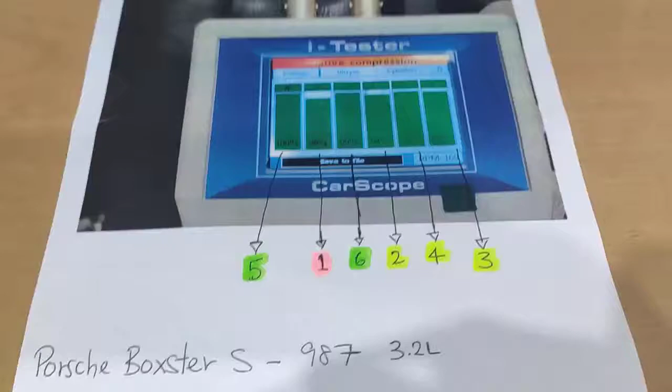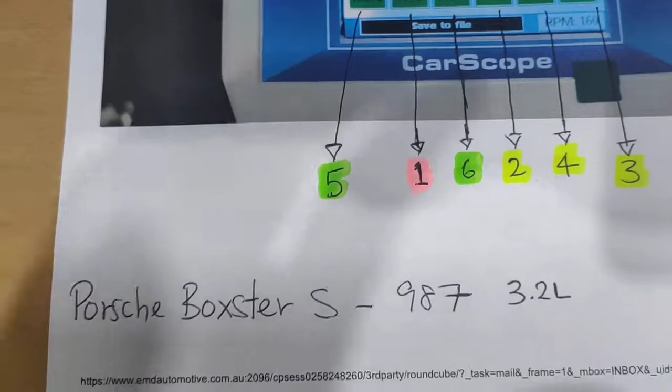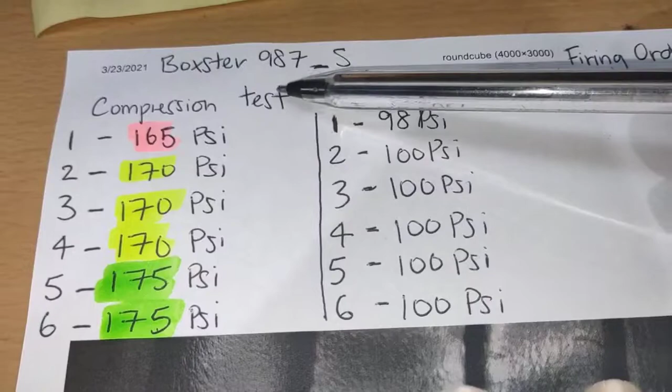2005 Boxster S 3.2 liter that I've done the actual, let me put the light on so you can see. I've done the actual compression check, which is that one there, and the valve leak down test is that one there.

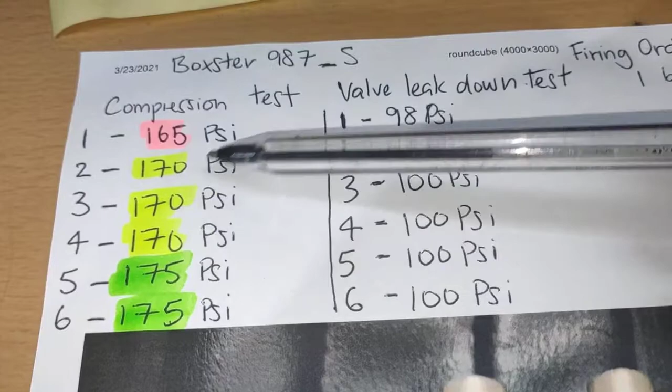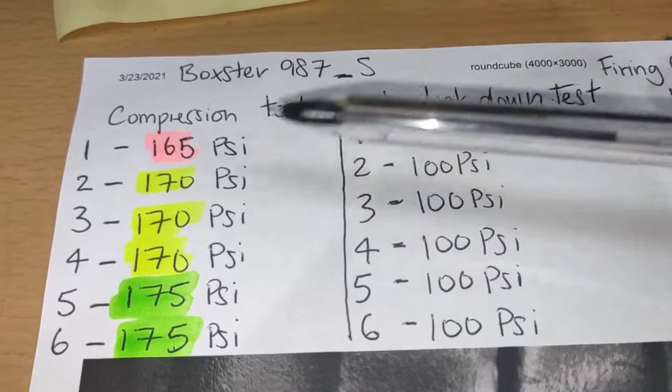I only highlighted in three colors. Doesn't mean this is pretty bad. It just means that actually the highest one is this one, the middle one is those three there, and the lowest one is 165. Alright, I've done the compression check. The first one was 165, 2, 3 and 4 was 170, and 5 and 6 is 175 PSI.

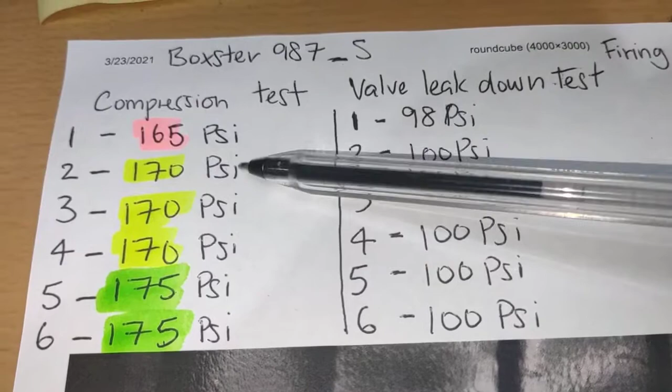Alright, so pretty much remove the coils and spark plugs out, put a compression gauge inside, thread it into the spark plug hole, start the car, and then pretty much read the gauge.

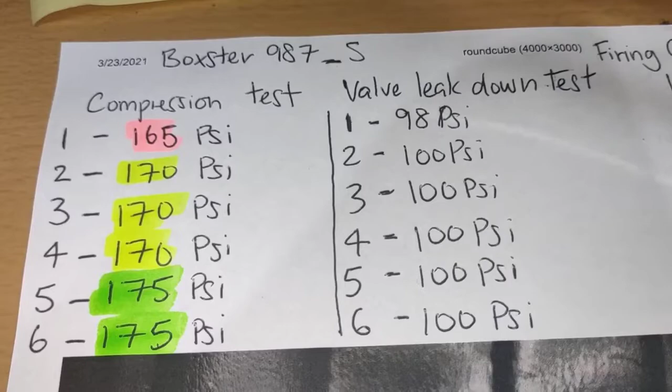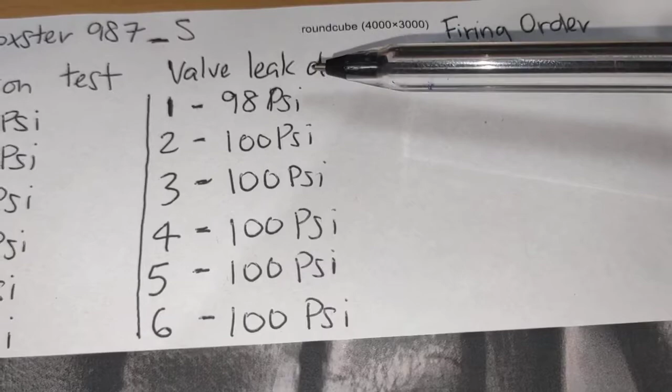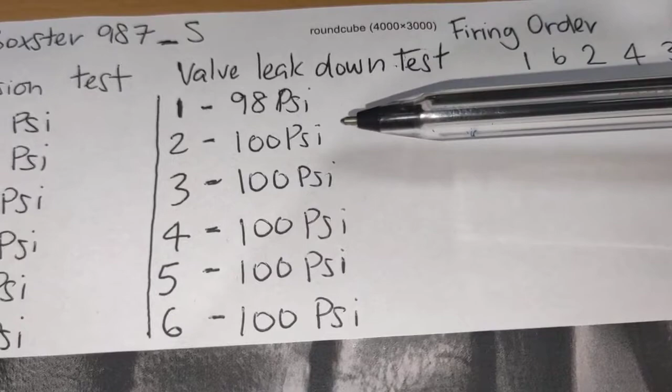Alright, the valve leak down test is actually a bit different from that. So what we do is we got a special tool that we put pressure into the actual cylinder, and we hold the crankshaft so it doesn't move. So we put in 100 PSI, and we expect the actual pressure to be held inside there.

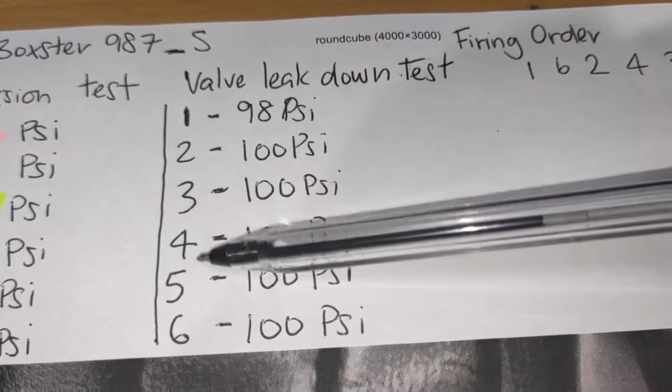So the only pressure drop I got was 98 PSI on cylinder number 1 only. 2, 3, 4, 5 and 6 pretty much holding pressure. 98, that's a really good reading.

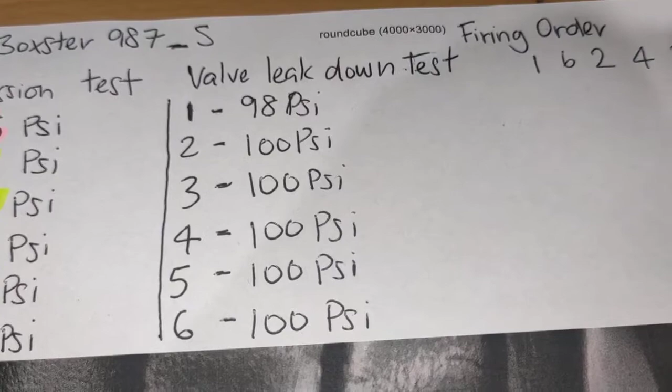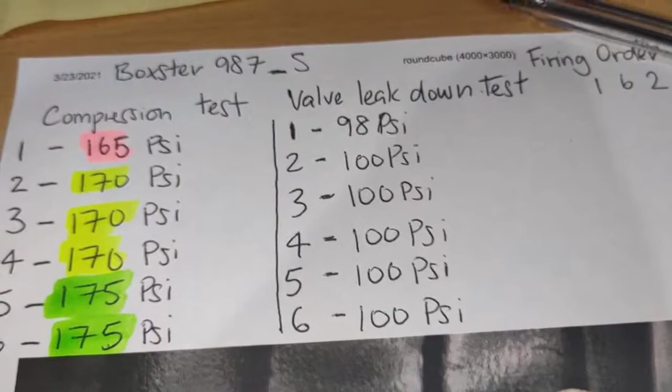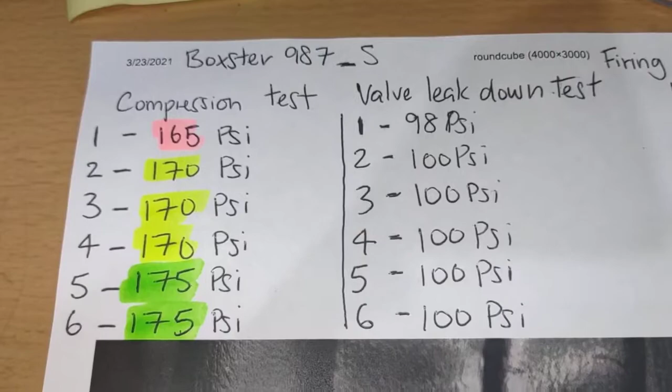So usually when they get older, you get a reading about say 95, 94, 92. Doesn't mean it's bad, but it's just starting to actually - they do lose over time. They do come down in values, but these kind of values here right now, this is really good. Nothing wrong here, it's just me color coding the lowest to the highest.

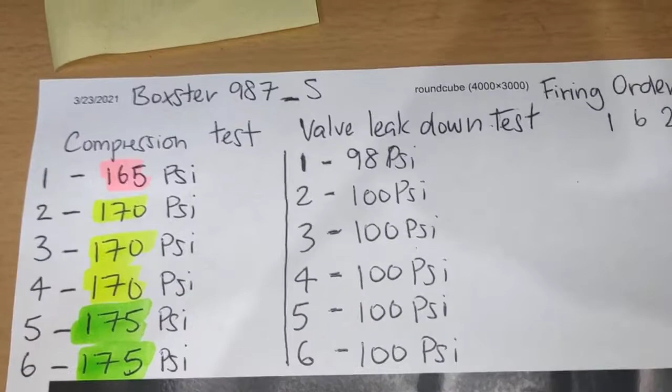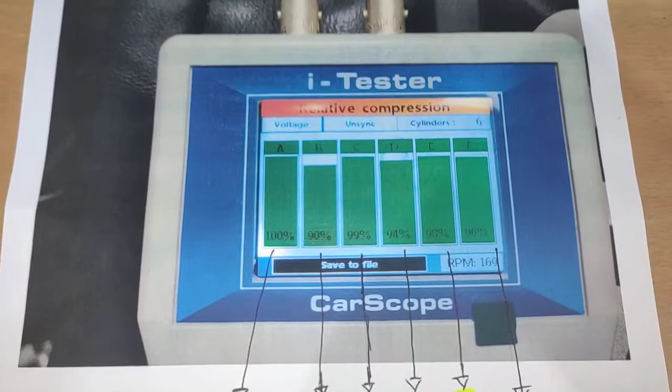Alright, that's pretty much the compression check value and the valve leak down value. Firing order is here if you want to know. And I've done a relative compression check using a special tool that I have.

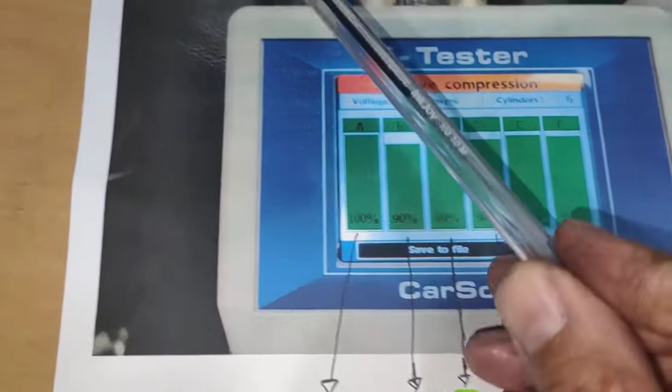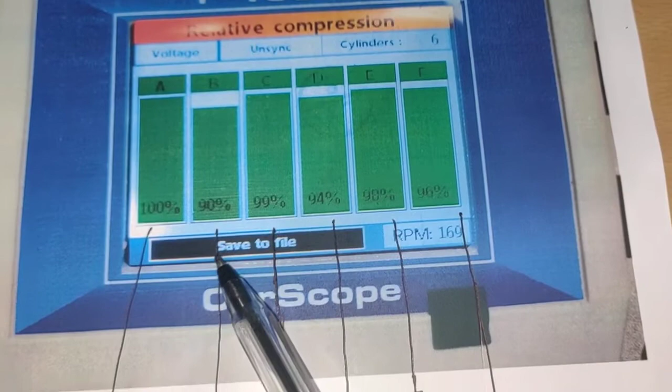So what I've done is just look at the lowest one, which is going to be the same as number 1, which is the lowest one at the actual compression check at the spark plug. The lowest I got was number 1, so I just have to look for the lowest one here, which is that one there. That's the lowest one I've got. Then that will be number 1, and then I'll just use the firing order to know which one is which. So 1, 6, 2, 4, 3, 5.

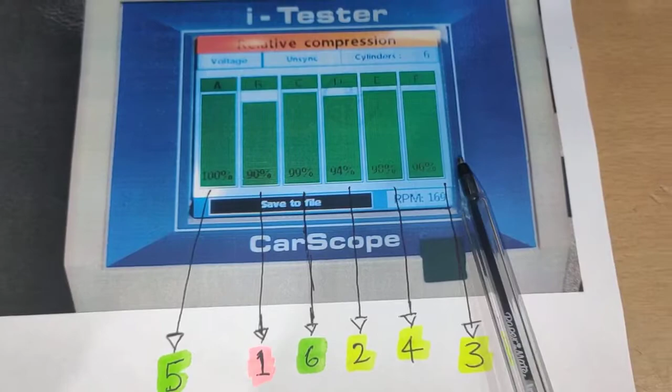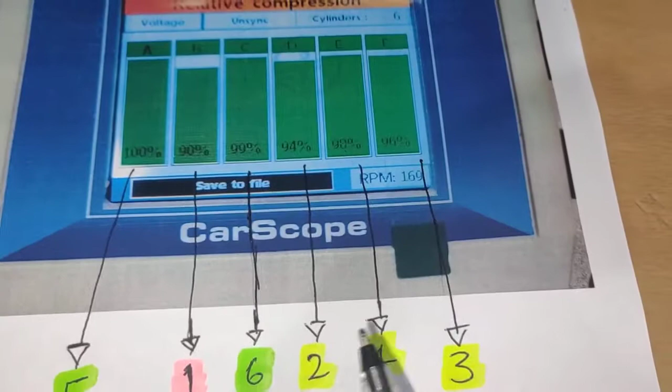If they're all 100%, it doesn't really matter, you don't need to put these numbers in. If they're all 100%, doesn't really matter, that means they're all good. But this is the actual relative compression check I've got. Cylinder number 1, I've got 90%, 6 is 99, 2 is 94, 4 is 98, 3 is 96, and number 5 is 100%.

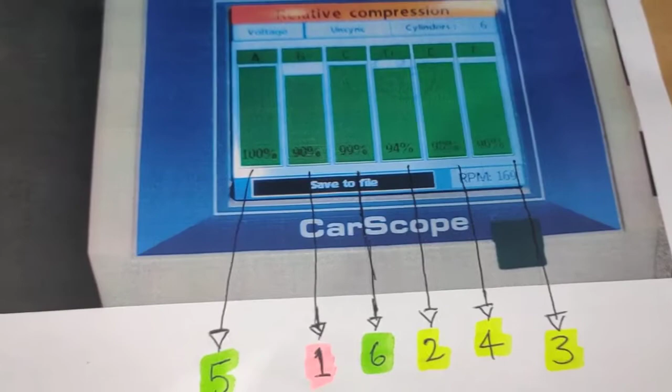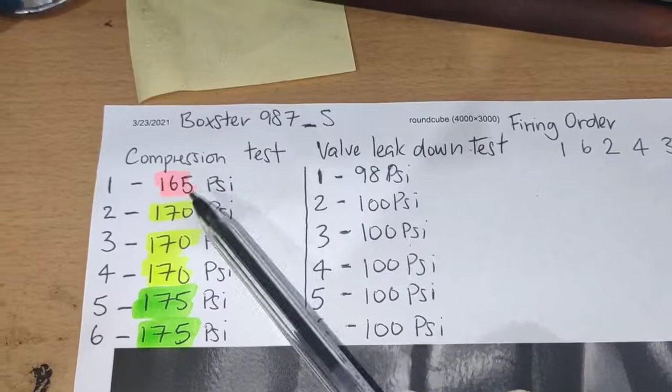Alright, this car here, this is a really good reading. Most of them are. If you have a problem, then you're looking at about 120, 119, 115 - then you have a problem. This reading here is pretty much good. Some have 180. I've seen the lowest is 150, and the car is still fine.